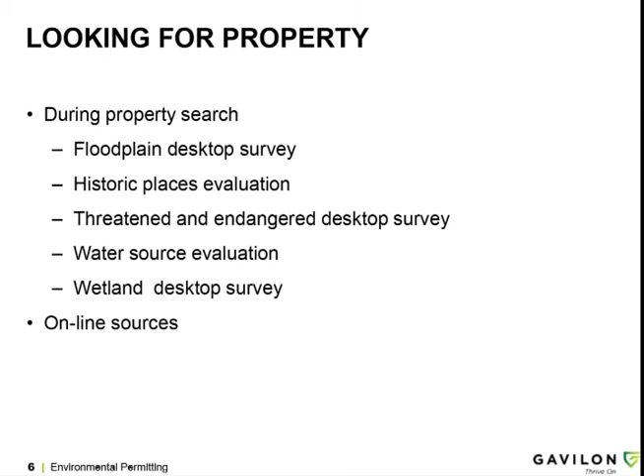One of the first things that we might check are the Federal Emergency Management Agency requirements for floods - see if we're in a flood hazard area. This is an example of a Google Earth layer you can get, where you can actually see whether your area is in a flood hazard or what flood hazard zone it's in.

It's really important because this can greatly increase the cost of a project. If you have to build up to a higher elevation, your costs are going to go up. And one of the bigger issues that you'll see nowadays is the Corps of Engineers has a program called the 408 permit. And if you're building near a levee, even if you're not on that levee, you may have to go through that permitting process.

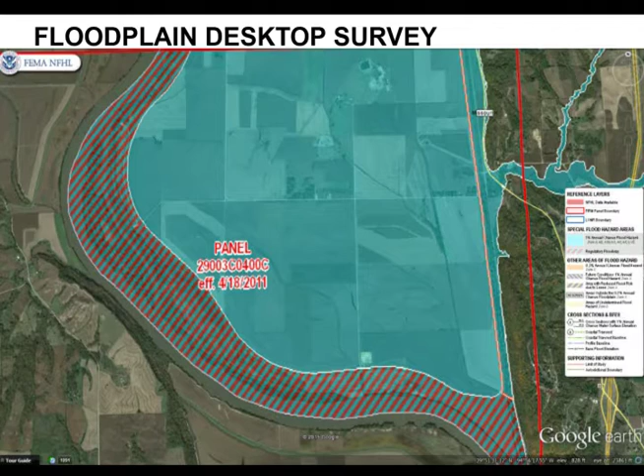And that can take up to a year and a half and require some extensive studies, so it's important to try to vet that up ahead of time. You may not preclude a property because of its proximity, but you may need to take into account that you're going to have additional time and costs associated with that one.

The National Park Service has a National Register of Historic Places. I also have a Google Earth layer for this. Most of these sites are buildings and structures that we don't tend to be building on or near, but there are a few that are just grounds in greenfield areas that might be archaeological sites. They might have found something there years ago. So I don't find these very often, but if you do run across them, they're not well delineated, so if you're anywhere near them, you may run into issues, and I'll talk about that later.

Threatened and endangered species: there's a federal fish and wildlife agency, and the name for the state agencies with responsibility for that varies a lot. It could be the Department of Natural Resources, Fish and Game and Parks. What you're looking for here is critical habitat for threatened and endangered species. Now, they don't have this listed for every state and every species. A few states have some good information, and Nebraska happens to be one of them. They have a list of, or maps with, critical habitat.

And if you are going to be doing construction in any area where there's critical habitat, you should coordinate that very early on, because threatened and endangered species, you can usually get around them if you time it correctly. They all have different times in which you could build — a nesting season, roosting, denning, pupping, mating, you name it. It's different for every single one of them, but if you figure out when that is, there are certain times you can go ahead and do construction, and once you've constructed, generally you're good to go. You don't have to worry about it anymore.

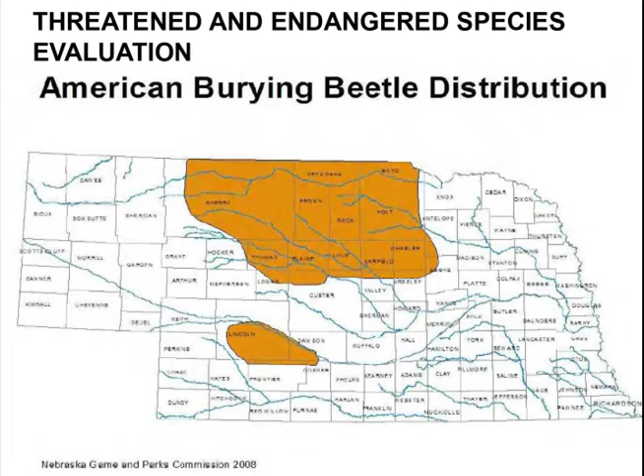And we laugh a lot about this, and I get harassed a lot when I have to do threatened and endangered species work, and it might delay a project. But it's really important to note that you have to take these seriously. If you don't know what this is — there's an infamous threatened and endangered species called the snail darter.

In 1973, this fish species held up the Tennessee Valley Authority's Tellico Dam for 6 years. They had built and spent $100 million on that project when this issue came up. And after going all the way to the Supreme Court, they finally ended up transplanting a number of these fish to a different area, and they were able to finally complete construction. So you can imagine the havoc this would create if you're trying to build a grain elevator and you had to wait 6 years. And obviously you might have a few legal fees if you have to go all the way to the Supreme Court.

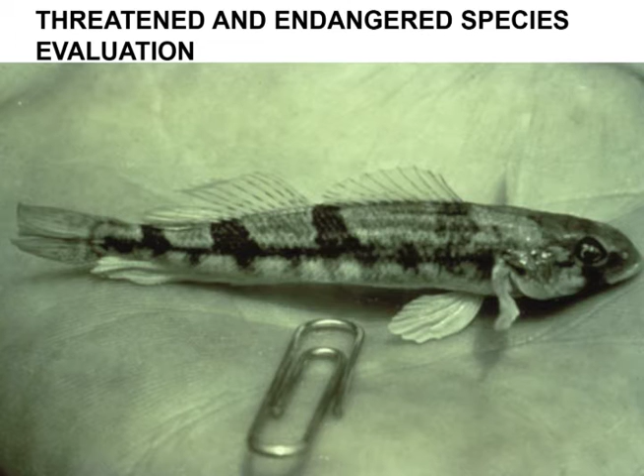Most of the grain elevators we're building aren't very water-intensive projects, but if you're also going to have fertilizer operations or grain processing, you may have to have a good source of water. This has become a problem of late. Fortunately, we've had a lot of rain in the Midwest and the Southwest that's alleviated some of this issue, but it's something you may want to look into ahead of time.

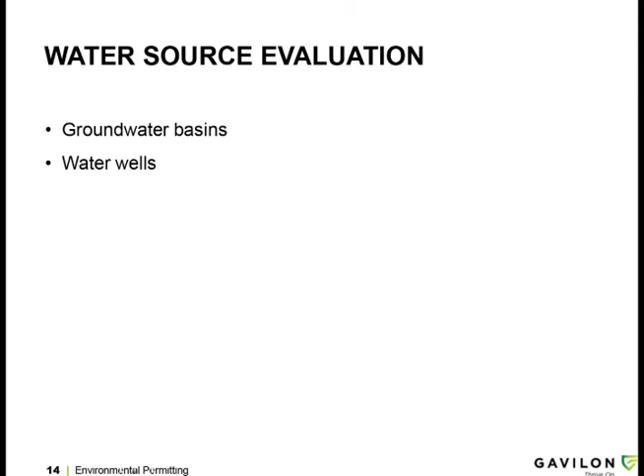There are a number of sites out there, it varies by state, but you can find information on depth of wells, how far you might have to go to get water, and then you can also find out how much water is available. There are some places where just because you own the property doesn't mean you can draw the water out from that well — you may have to purchase water rights for that area, which can increase the cost of your project.

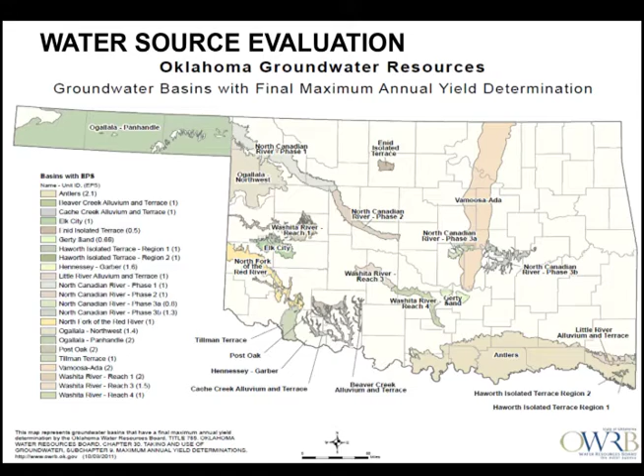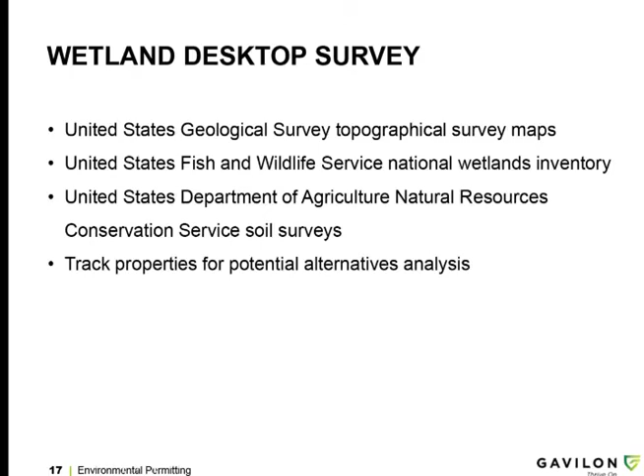And finally, the wetland desktop survey. Some people refer to this as a wetland determination. You can't formally determine if there's a wetland on your property without actually going out and having a wildlife biologist inspect the area and look at the plants, and I'll talk about that. But you can get a good idea if you're going to have issues by doing some desktop surveys. One of the items you look at are topographical maps.

If the topographic map shows any signs of water on the site, even if when you're at the site you don't see anything, that's a sign that there might be hydrology, which is one of the indicators of a wetland. So you typically check out the topographic maps.

The Fish and Wildlife Service has national wetland inventory maps, you can get a layer for this. If you have a highlighted area that indicates a wetland, the onus is on you to prove that it's either not a wetland or it's not jurisdictional. It's not uncommon—they pretty much did flyovers to determine, and did reflectivity tests to see if there was water on the site.

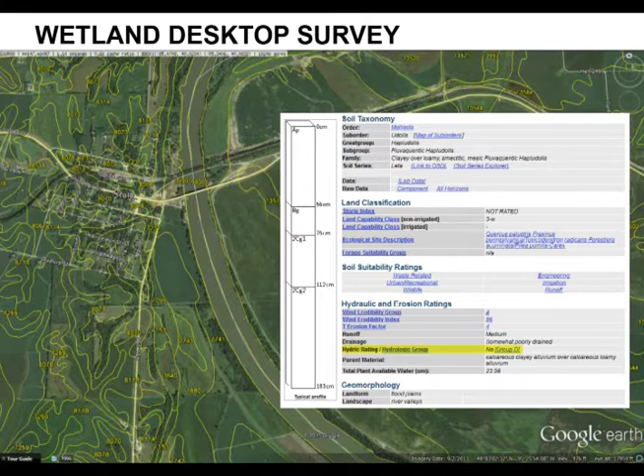So these aren't 100%. They could have just had a heavy rain that day. But I can guarantee you a regulator is going to look at these maps, and they're going to want you to prove that it's not a wetland on your property.

You can also check soil survey maps. Sometimes people do this as a geotechnical investigation, and that's often done as a fatal flaw analysis too, because depending upon the footings and things, geotechnical stabilization you need, your costs can also increase there.

Now, this will only tell you the surface soils, but you can actually go in and determine if these soils are good for wetland plants. You can click on the soil, look at the type, and it'll even tell you if it's what they call a hydric soil or has a hydric rating. So if you have hydric soils on the site, that's a sign too that you might have wetlands there.

So that's everything you might do before you even select the property you're going to get. But before you buy that property, one of the things you might want to do is a Phase 1 environmental site assessment. Typically you hire a consultant to do this because there are certain minimum criteria and qualifications they need to have, and we typically do this one month to 180 days before you buy the property.

One thing a lot of people don't know is under the environmental liability rules that we have, you could be held liable for the cleanup of that property, which could be millions of dollars, even if you had nothing to do with it. You bought property that had some contamination in it, and you didn't contribute to that contamination or cause any of it.

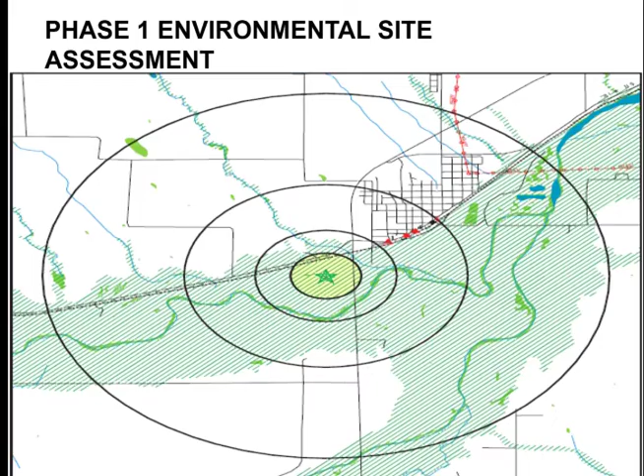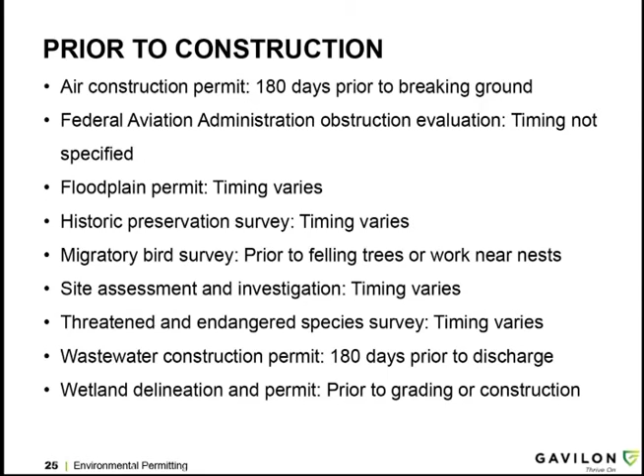Once you've bought the property, but before you start breaking ground, there are a lot of items you might need to take care of well in advance of potential construction projects before you actually break ground. One of the biggest that Eric will touch on even more are the air construction permits.

There are a lot of different types of permits out there. It depends on the state and the project, but it could take up to 180 days to get the permit. Some states have statutory limits on how long it takes. Like Illinois says once you give them a complete application, they have to give it to you in 90 days. And, of course, I've done permitting there, and it took 90 days exactly—they finally sent me that permit application.

Other states have other statutory limits, but what you'll see happen is that limit doesn't start until you've given them a complete application. And what they'll do is reject that application for any small discrepancy because they're under a lot of pressure to get them done on time. So I would start these as soon as you can, once you know what your project's going to be.

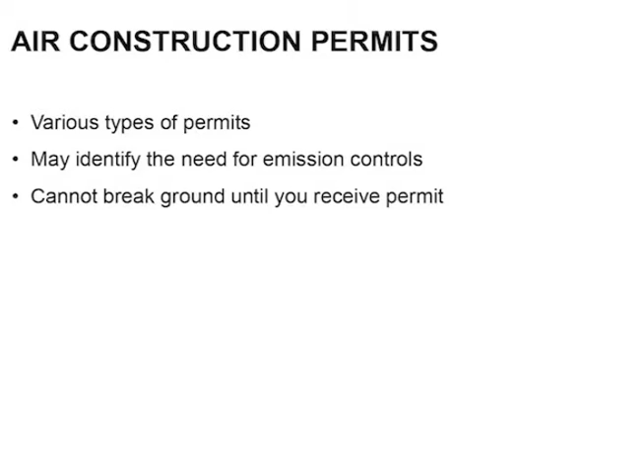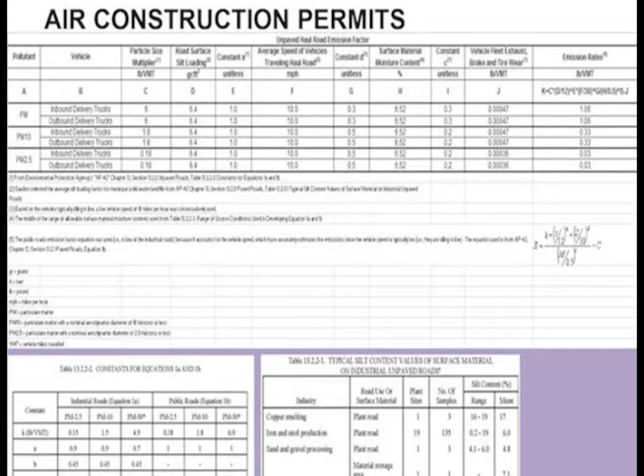To do an air permit application, you're going to give them a lot of information about your site, your company, and what you're going to do there. You're also going to have to do emissions calculations, using available Environmental Protection Agency emission factors to determine how much—probably particulate matter is the primary pollutant we have—is going to be emitted from the site.

And if you're unlucky, you might have to do air modeling, which can be expensive. If it shows that you're going to exceed a national ambient air quality standard, you may have to put in some sort of control devices. Your emissions may require you to do that too. So it's something to start way ahead of time, because that can greatly impact your bottom line, or your project.

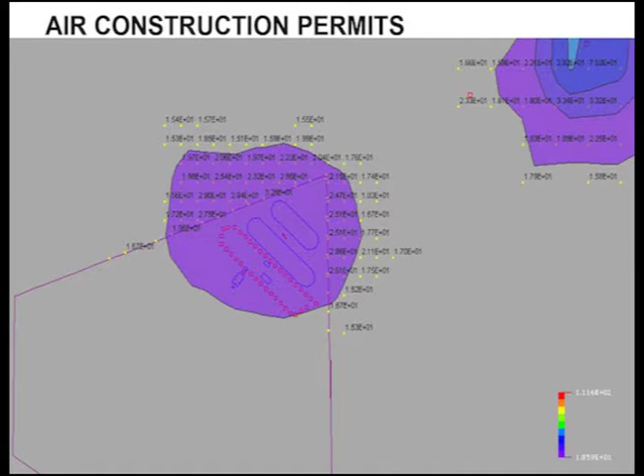Now, this is an environmental issue, but sometimes I just get stuck with permitting items. It doesn't matter what the regulatory agency is. So I threw this in there because you may end up getting stuck with it as well.

The Federal Aviation Administration has an obstruction evaluation that you may have to complete. They have this really complex formula depending upon your distance to an airport, with all sorts of criteria, but the general rule is if your building is going to be over 200 feet tall, or 150 feet within 20,000 feet of an airport, you may have to submit this obstruction evaluation criteria to the FAA.

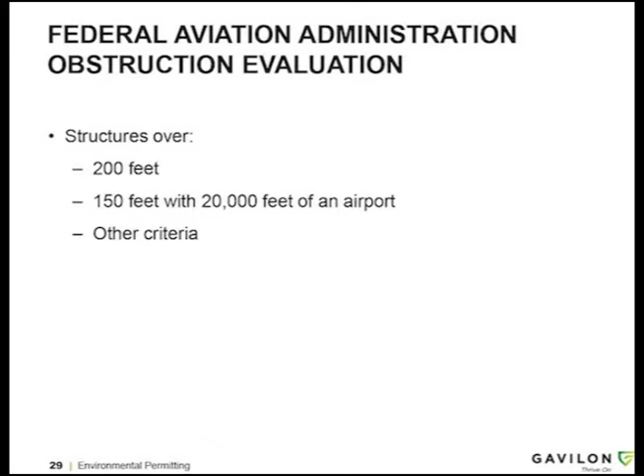Now, when I talk about 200 feet or 150 feet, we're talking about the overall structure, not just your grain bin. So if your legs, head house, or something else is taller, that may require you to submit this. I haven't run across this, but at the end of the day, they could possibly deny it because you're too close to the airport or require some sort of lighting device on top of it.

We've been fortunate and never been required to do that. And one thing to keep in mind when they say proximity to an airport, we're not talking about O'Hare Airport, we're talking about some pretty small airports. I've been shocked when I found out that the FAA considered certain grass fields that somebody lands a plane in occasionally as an airport. So you have to make sure you evaluate that carefully.

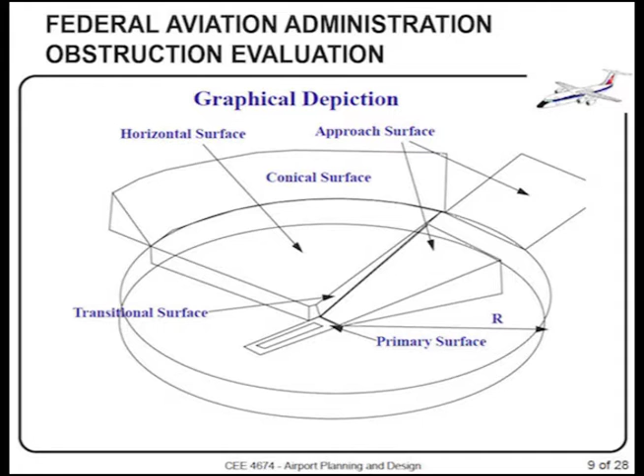So I mentioned the floodplains earlier. Depending upon the floodplain coordinator, which I see a lot of variability in, the local coordinators tend to ask for different things, but you may have to do a no-rise or encroachment certification. What that means is your project isn't going to cause the flood to be worse, because you're not going to displace the water and cause the flood to be worse because of your grain elevator.

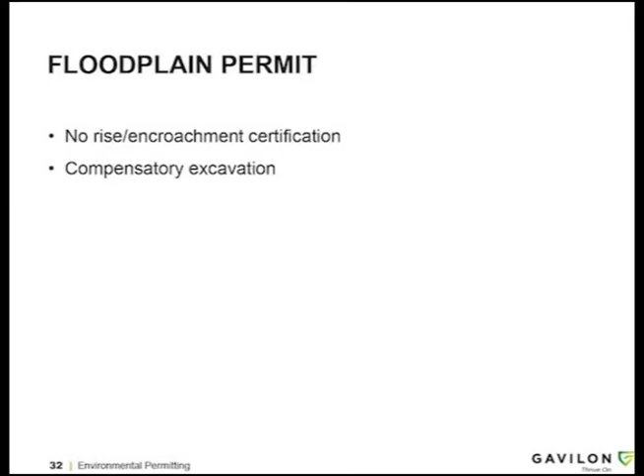So you may also be required to flood-proof or raise up your occupied buildings above a certain level. And the other thing they might do is they might require you to offset your building. So if your building's going to displace 100 cubic yards of water during a flood, you can dig a sedimentation basin that's 100 cubic yards to offset that in a nearby area.

The National Historic Preservation Act doesn't have a permitting policy for it, so there's nothing that you normally are required to submit to the State Historic Preservation Office, but there are a number of other permits that you may have to submit, and they will ask you to either submit something to the State Historic Preservation Office or they will submit something for you. The Corps of Engineers will do this. They'll ask for comment from the State Historic Preservation Office, and that's why it's important to address that early, because you never know who's going to send something to them.

And these are interesting projects when you get them. The State Historic Preservation Office, depending upon your location, and I don't have a good understanding of when they're requiring this or not, but they may require you to do a Phase 1 survey. And they'll go out to the site, and they're looking for certain indicators. Sometimes they're just looking for ridges that stick out from the normal topography. And they're going to do some shovel tests and dig down and see if they see any archaeological sources.

And if you're unlucky and they find something, you're going to have a couple options. You can either avoid that area, build somewhere else, or you can do further study to verify whether it's truly an archaeological source or historic place. They're going to go out and they're going to dig a pit, and they're going to sift through all that. I haven't had this delay a project yet, but these can be really time-consuming and cause a lot of problems.

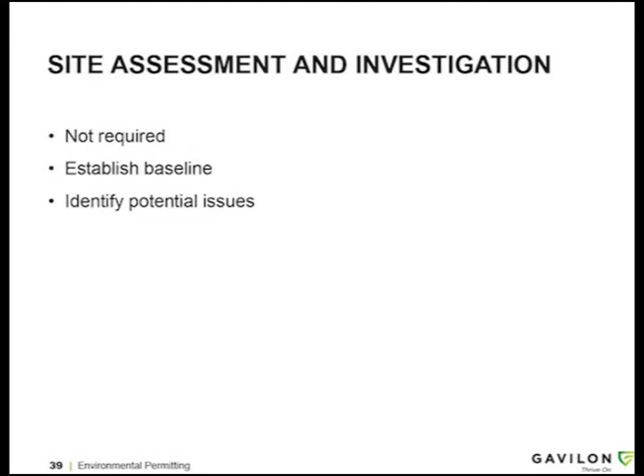And threatened and endangered species surveys—hopefully you've coordinated with your state office on this. This is very timing specific, as I mentioned earlier. Hopefully you can avoid having to do this, but if you can't, you may have to do a survey. You'll have to have a wildlife biologist come out. And I get harassed the most over threatened and endangered species out of any of the things that I do and am made to do.

One of my favorites: on one of the projects we worked on, if you're in western Kansas, western Nebraska, or South Dakota, you're in the swift fox area. It's a threatened and endangered species, and we had to have a wildlife biologist come out and do a den survey. They looked for any holes in the ground, and around all the holes they found, they had to spread a sand and glycerin mixture, wait a day or two, and then look at the tracks to see if any were swift fox tracks. Fortunately, none of them were—but that didn't prevent all my coworkers from volunteering to go hunting and take care of that issue for me.

But this is very species dependent. Every endangered or threatened species has a different type of survey and timing issue, and that's why you really need to get on that up front and talk to the regulators. Generally it's not something you can't get around, but you need to plan for it ahead of time.

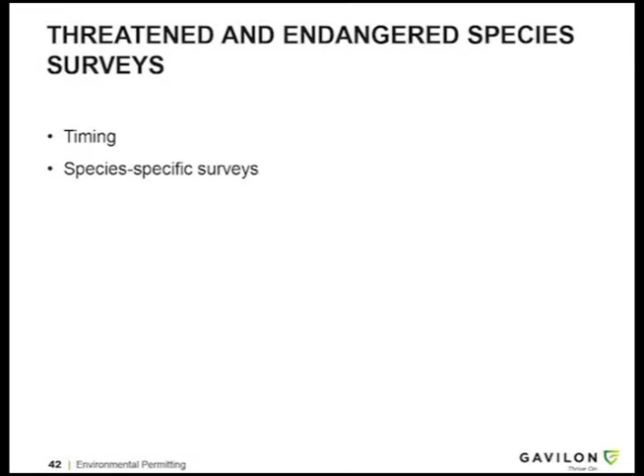And finally, wetland delineation and permitting. This is one of the more controversial issues that we deal with. There are lawsuits—the Corps of Engineers just recently issued some guidance, and they're being sued again over that. One key thing to remember is you have to do this delineation seasonally. You can't go in the middle of winter, because if it's snow-covered or there are no plants at the site, they won't be able to do the delineation. So you have to plan the timing on this as well.

One of the reasons this is so controversial is you may not have any water at all and have a wetland on your property. This is one of the things I tell people all the time - I don't always try to make sense of the regulations, we just try to comply with them. Why would a wetland be wet? That's just how the regulators think of things.

So you need to have somebody who's probably a wildlife biologist or knows the plant life in your area come out to the site, and they're going to look for 3 criteria. They're going to look for hydric soils, do a shovel probe, and survey the soils to determine if it'll support wetland plants. They're going to look for wetland plants, wanting a dominant wetland species in each area or canopy - looking at the ground, the shrubs, and the trees, all different wetland-type plants they might have.

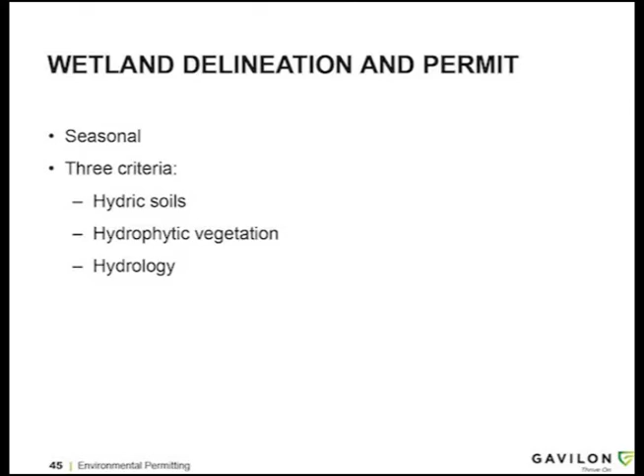If you have wetlands on your site, obviously the first thing you want to do is try to avoid them. If you can't, you may have to submit a permit. Depending upon the quantity of wetlands you're going to disturb, you may be able to get by with a nationwide permit, which is real easy with a limited time frame - may only be 90 days. But if you have to do an individual permit, we could be talking - I know in one state they said 1.5 years to get that permit. So trying to avoid them is important.

When I talked earlier about doing that desktop survey for wetlands, one of the things it's good to do as well is to track all the different properties that you look at, because they are going to want you to submit, if you're going to disturb a lot of wetlands, an alternatives analysis - meaning you have to show them you looked at all different types of areas and didn't just select the one with the most wetlands. Fortunately, when you discuss why you chose a particular site, you can take into account production issues like access to rail, farms, highways and things like that. But it's good to keep track of that information in case you have to do this permit.

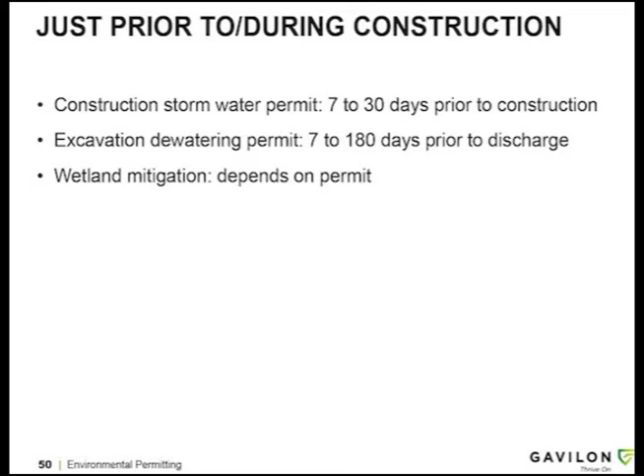So that's all the things you need to do well in front of beginning construction. There are a few things you do either right before construction or maybe even during construction. The construction stormwater permit is one of them. If your project is going to disturb an acre of ground or more, you're going to need to submit a construction stormwater permit to the state. Most states, this is 7 to 10 days - there are a few states that have 30-day time frames. One of the issues is that in a lot of states, they are also going to want you to coordinate with the Historic Preservation Office and the Fish and Game or Threatened Endangered Species entity, and that can take longer.

In Nebraska, it's great because you are automatically approved once you submit it in 7 days. But what they don't tell you is that the Nebraska Fish and Game takes 30 days to review and approve it, and they can't get you your construction permit until that's done. So you've got to give this a little bit of time. We're talking about disturbing 1 acre or more - if you have a 10-acre project, you can't just divide it up into 11 parcels and say it's not disturbing 1 acre. They're wise to that; they look at the greater project development. A lot of home builders try to get away with that - they would have all these 30 acres broken up into half-acre lots and say they don't need a construction stormwater permit.

So the purpose of this permit is to prevent erosion and sediment. You have to submit the permit application and develop a plan which identifies the sediment and erosion control measures - that's your typical silt fences that you see at these sites.

During construction, depending on the phase, you'll need to do inspections weekly or monthly, and after every rainfall event of a half-inch or more, you need to go inspect. One mistake people make is forgetting that this permit remains active until you get final stabilization, meaning all disturbed ground must be covered with a building, concrete, a stabilized pad, or natural vegetation. People forget to account for this up front, leave open soil, and can't close the permit, so they have to keep doing inspections in perpetuity. It's important that your contractors know to put in vegetative stabilization when they're done, so you can close out the permit. Otherwise you have this open liability.

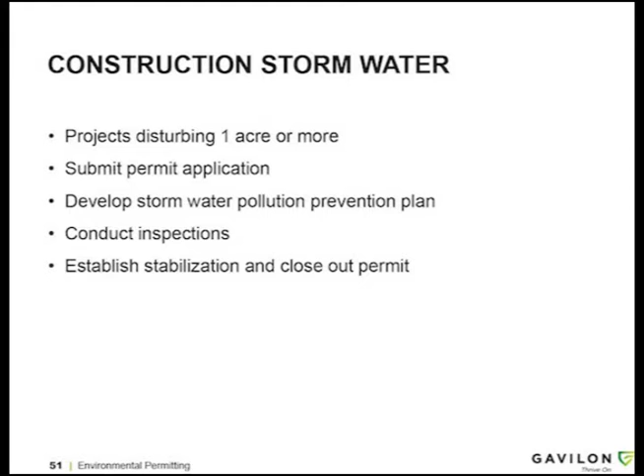Excavation dewatering: some construction permits cover this so you don't need a separate permit, but some states don't include that. So if you've got a high water table or a lot of rainfall, you might have to put in a dewatering pump and discharge the water to do construction, and you may need a permit for this.

This permit has varying time frames. A lot of states have general permits you can get quickly, but you'll probably have to sample the water. They want to make sure you don't have a lot of sediment, and may send it for analysis of sediment, oil, and grease. You'll have to fill out your monitoring report, possibly going online or submitting information showing the concentrations and volumes of water you discharged.

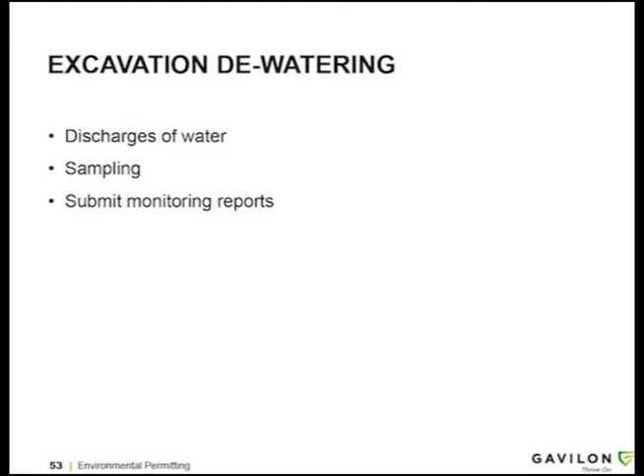Finally, the last permit you might need, typically addressed during construction or towards the end of the project, is if you've impacted a certain amount of wetlands, you may have to mitigate them, meaning you build a replacement for the wetlands that you filled in.

You have two options: on-site mitigation or a wetlands bank. Fortunately, for grain elevators, if you have a rail loop on your site that you're not going to fill in with ground storage piles, that makes a great place to put in a mitigated wetland. You can build one yourself. The key is to take the soils from the old wetland, stage them on the side, then put them into your new mitigated wetland area, which helps get growth going. The Corps of Engineers will want you to monitor this for a certain number of years, maybe 5, having people check that it's growing appropriately. They'll likely require some sort of deed or covenant change protecting that wetland in perpetuity - you can't just build it and then fill it in again three years later. It has to stay forever.

Your other option is a wetland bank. If you can find one in the same watershed, you can pay somebody - you say you need a certain number of acres of wetland built, or need to buy that many from them, and they set those aside for you. It's a little easier, you don't have to do as much, but you have to pay for it. Typically, if you're going to fill in 1 acre of wetland, they'll want a 2.5 multiplier - so you fill in 1 acre, and they want you to build or buy 2.5 acres of wetlands.

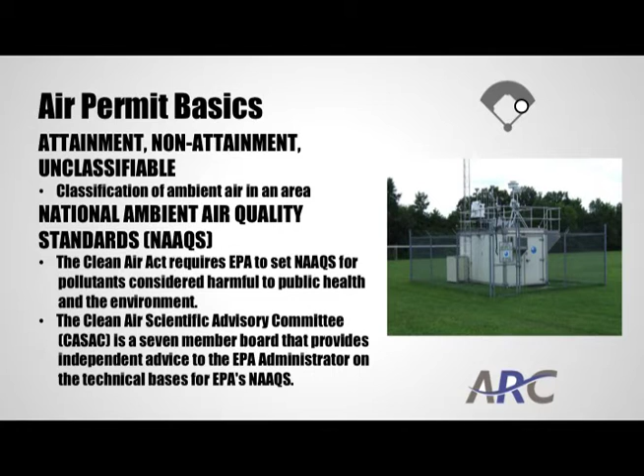Brian touched on this, and I'll skip over it quickly, but when people talk about air permitting, it's not just one type of permit. There are many types of permits out there. There's construction, operation, many types of construction permits, many types of operation permits. And they all have different thresholds, different requirements, and different triggers.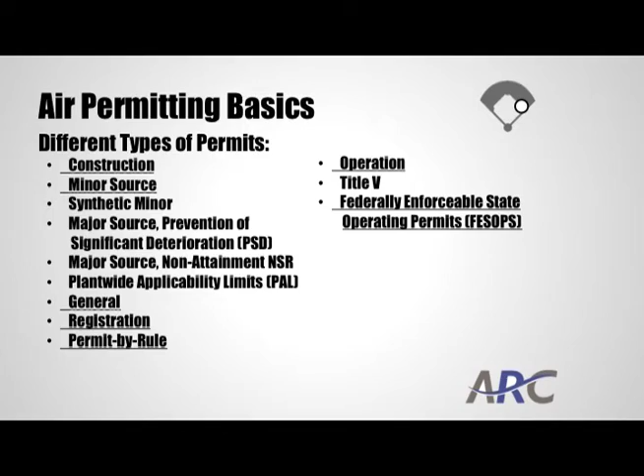It's been said a lot, so I'll just repeat it, but construction permits are needed before you begin construction. In general, what is construction? We have to define it. The Clean Air Act, in most states, calls it the initiation of physical on-site construction activities on emission units which are of a permanent nature. So that would be maybe pouring concrete or setting footing, something permanent. These are things that you cannot do until you actually have your permit in hand or a waiver to begin construction.

Operation permits are something that are usually required 12 months after you begin operation of the unit constructed and you already have the permit in hand.

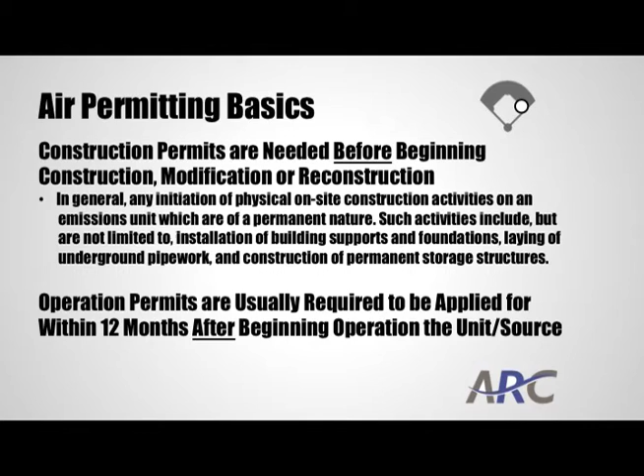I know we have a large group of folks here coming from a lot of different areas, and it's great that so many people could come. But we can't really focus on each state because we wouldn't have time to do that. I just want to keep in mind that each state has its own permitting agency, because sometimes there are local districts within a state. They have their own techniques, mechanisms, and ways of issuing permits and processing applications. So it's something to keep in mind: where you're at and who's writing your permit is going to depend heavily on how it's going to end out.

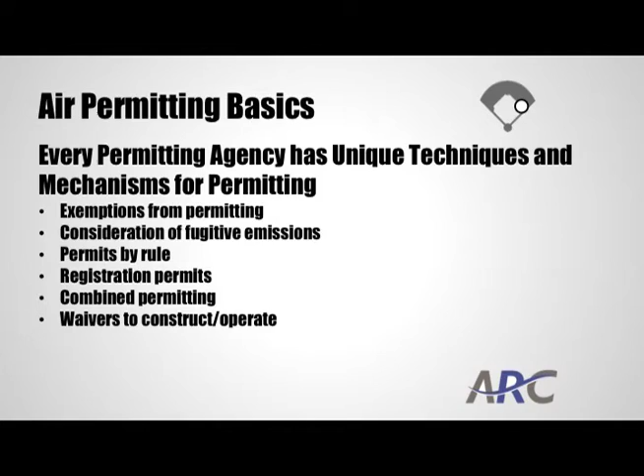So when we talk about emissions at your plant, what are those? What do we have to consider? What do we not have to consider?

Just in general, when we talk about emissions, these are usually dust, fume, smoke, vapor, gas, or other gaseous or fluid particulate matters coming out of your stacks or from different areas. In grain elevators, we're usually talking about particulate matter, so that's short for PM.

The PM will mainly come from hauling, receiving, handling, storing, drying, cleaning, and shipping grain. There's also combustion emissions to take into account, from combusting natural gas or diesel on site, which causes carbon monoxide, nitrogen oxides, greenhouse gases, sulfur oxides, and maybe trace amounts of HAP. These would all have to be considered for permitting as well.

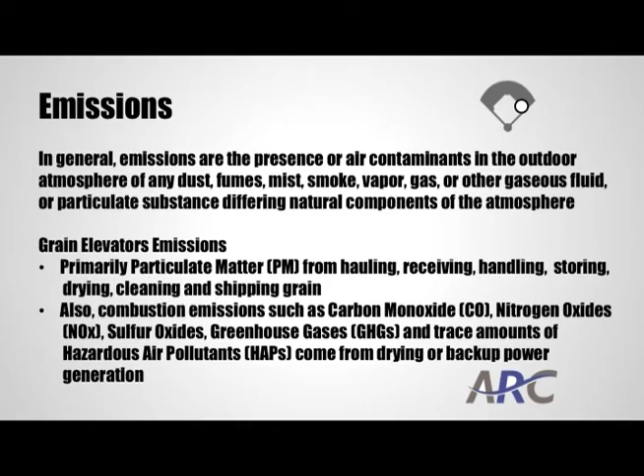CEU question here. In general, the emission's source is any stationary source of emissions or group of stationary sources of emissions. So sometimes it's not just your elevator or what you consider to be your elevator - it could be an elevator nearby, or a plant nearby. You have to take into account the proximity and location of all emission sources in a particular area, your industrial classification, and the control and ownership of the different sources in the area.

So if you maybe have a contract to give grain to another person or entity nearby that also emits, sometimes you have to consider that entity as well when it comes to Clean Air Act permitting.

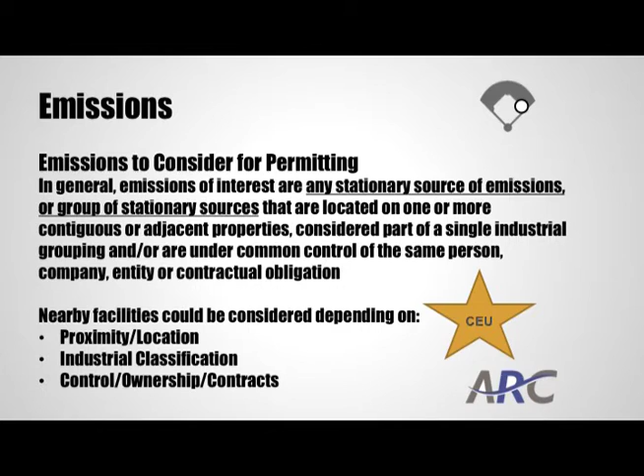Also, not all emissions are created equal. Sometimes we have stack emissions - those are primarily the ones you'll see with limits in your permit. But then there are fugitive emissions too, which come from a road or maybe a storage pile. Your dryers are oftentimes considered fugitive emissions. These are ones that cannot reasonably pass through a stack.

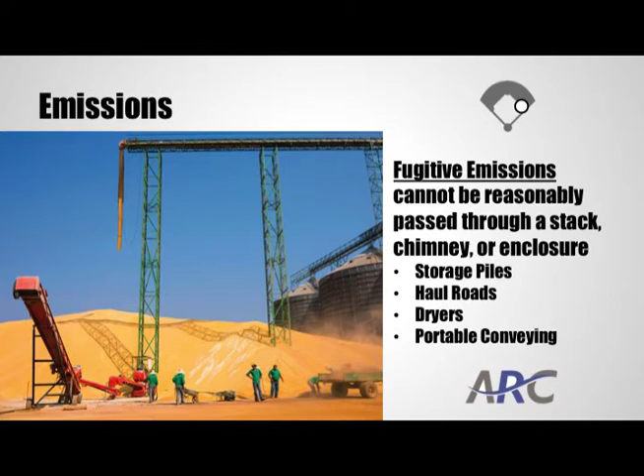Circling back to PM - it has many different phases, and since 1970 it's been regulated in many different ways. Without boring you with the history, it really started out as just the filterable particulate pollution that you could see, the heavy suspended particulate.

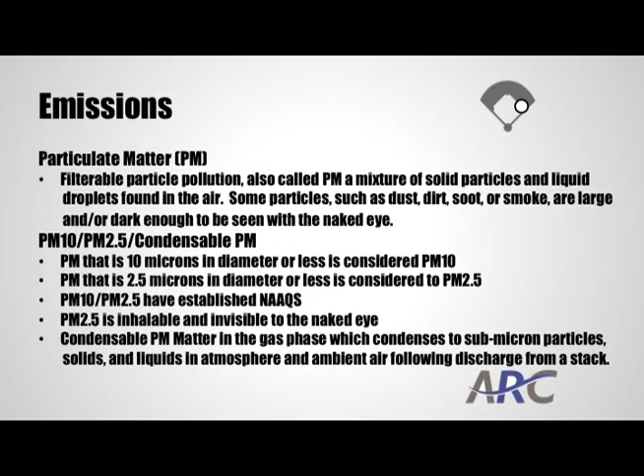As more research was done since 1970, people started to figure out about PM10 and PM2.5 - particulate matter less than the size of a hair. This is the stuff you can actually breathe, and this is what EPA and state agencies started to focus on, because this was the one that was actually hurting humans. These are so small that oftentimes when you inhale them, they get lodged into your lungs, and this was the one EPA was actually worried about.

And PM2.5 also forms in ways that you can't see. So after you combust natural gas, it gets into the atmosphere, and these really light gaseous matters condense into particulate matter of PM2.5.

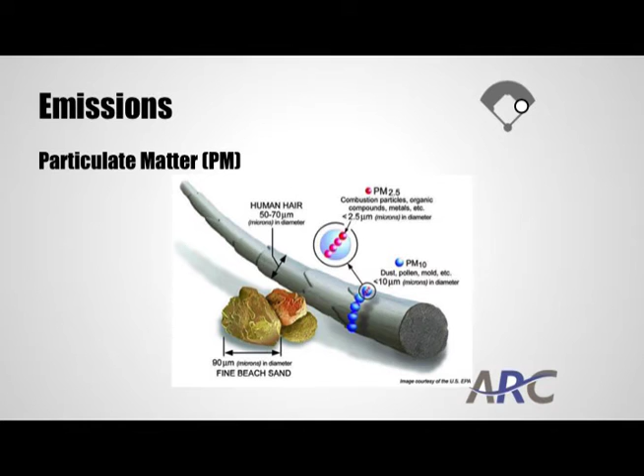A baseball reference here - if you build it, they will come, from Field of Dreams. I think building is a great thing. It helps customers, profits, operational flexibility, but when you build, you have to consider that changes can be public information - it can be in the newspaper, visible from a roadway - and if it is, and you don't have the permit, regulators could also be coming as well.

Another CEU question: how should emissions be evaluated when considering if we need permitting? By a show of hands, who's heard of the term potential to emit?

This is a very theoretical calculation that makes you want to hit your head against the wall sometimes, but it's taking into account if you have a piece of equipment operating 24/7 - and you don't get to consider the add-on controls unless you have a permit or some other regulation requiring you to operate that control device. So imagine a dryer operating 24/7, which would probably never happen, but for potential to emit purposes and considering whether you need a permit, you have to consider as if it would run 8,760 hours a year.

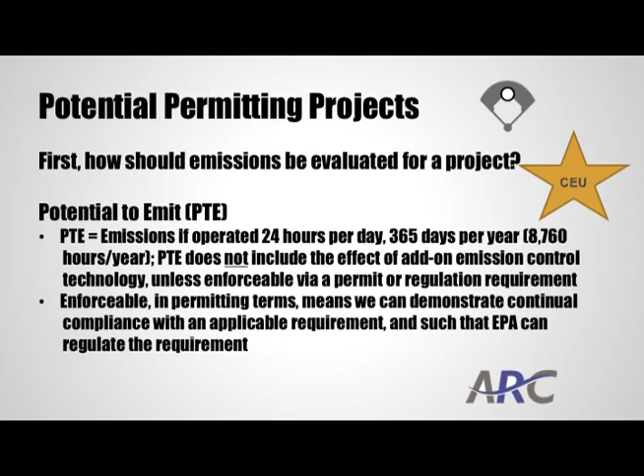And when considering if you need a permit and evaluating potential to emit, people always talk about change - what's a change, what's happening at the facility? The Clean Air Act really doesn't say what a change is, which can make this difficult. It says what a change is not, but it doesn't really say what a change is. By the way, things the Clean Air Act does say are not a change include ownership adjustment, increase in hours of operations, or routine maintenance and repair.

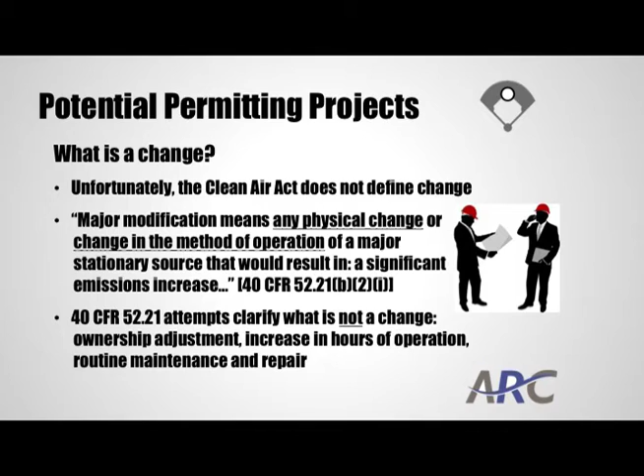But there are things you might need to consider for air permitting, and this is just a short list, there could be others. Building a new plant, or a new plant coming nearby. Changing or removing pollution control equipment, changing stack location or pickup point, changing your process flow diagram, maybe grain's going to be handled or stored differently, or cleaned differently. It could also be changing your haul road routes, maybe changing the way trucks come in or out, like we talked about paving roads in another presentation. These are all things that could be considered on whether you'd need to change your permit or apply for a new one.

Essentially, if you have a previous permit application, and you're changing anything from that application, it would probably need to be evaluated for permitting as well.

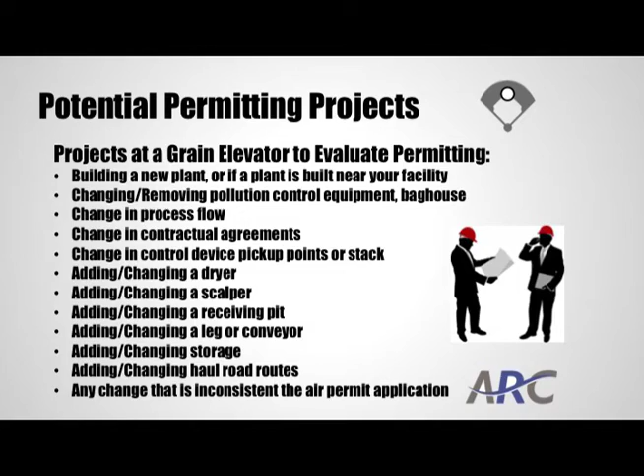I'll try to skip through these pretty fast since we're running a little behind, but every state has their own permit thresholds. These are kind of federal EPA major source construction thresholds, so if you trip these, you'd have to go down the route of submitting a permit application to your permitting agency.

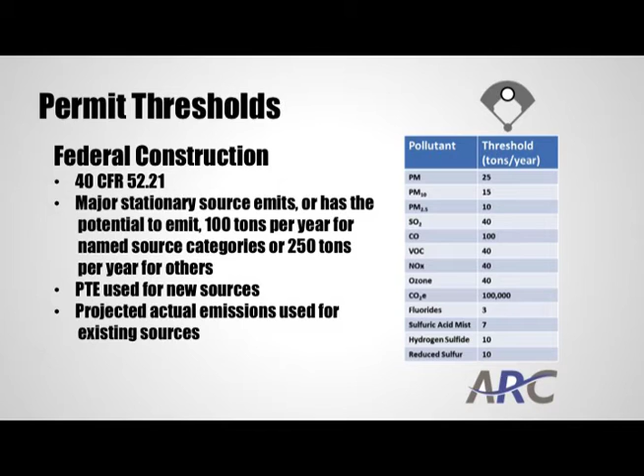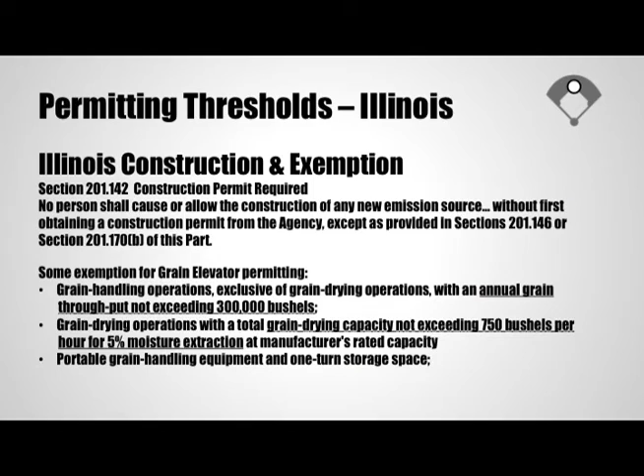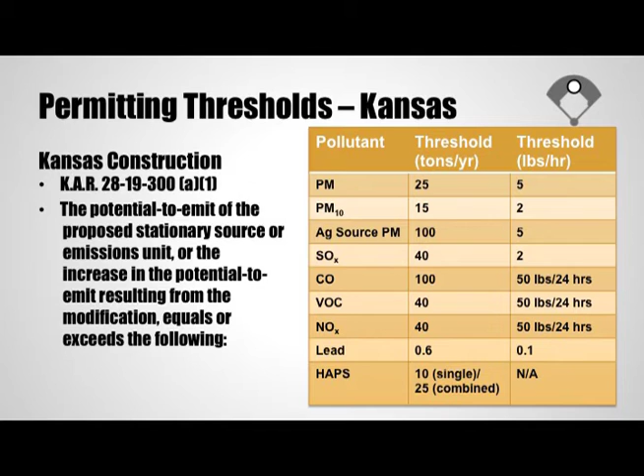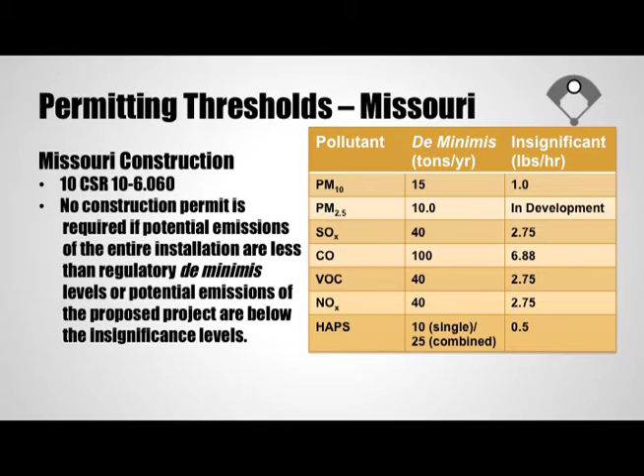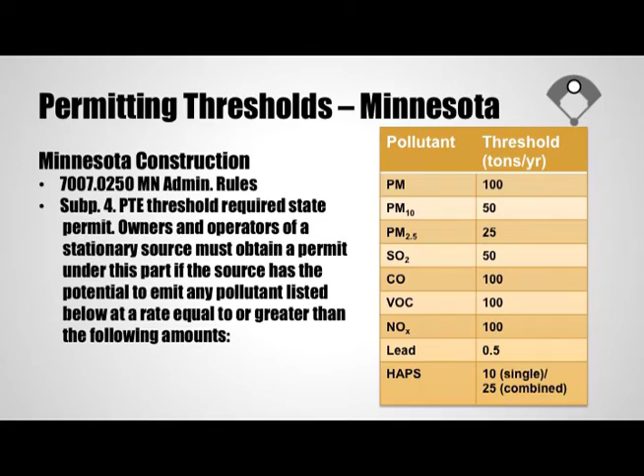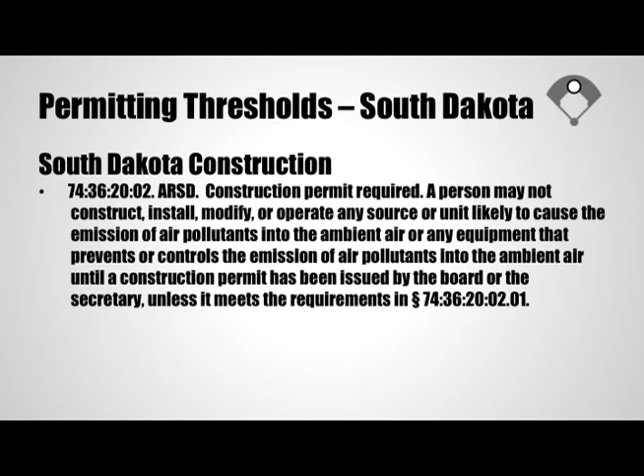Something Brian touched on earlier, and I just want to reiterate, how long it will take to get a permit depends on a lot: the size and complexity of your project, the permitting agency writing the permit, and also the expert advice being utilized to submit your permit application.

How long will it take to make an application? It'll depend again on those three things, but you have to do emission calculations, a regulatory analysis to see what federal and state standards apply, fill out a lot of forms, and many times you have to do ambient air modeling, which we have a graphic up here for. Sometimes you even have to negotiate with your permitting agency about what kind of application you should be submitting.

After your permit application is deemed complete, which can take a while for your permitting agency to determine, they then have to process it to put your permit out on public notice. So it can take 3 to 12 months, shorter or longer. Most agencies, I'd say, take 6 to 9 months, but some act a little faster, and some take a little longer.

The public comment period is usually 30 days for these permits, that's for the public to give input on whether they agree or disagree with the permit, or have any issues with it. Each permitting agency actually has a requirement to respond to all these public comments. So as you can imagine, if somebody was really challenging a permit and didn't want it built, and the Sierra Club does this a lot, other environmental groups will challenge permits just to hold them up so state agencies can't issue them. I think this is a horrible thing, it makes the project get held up for a very long time.

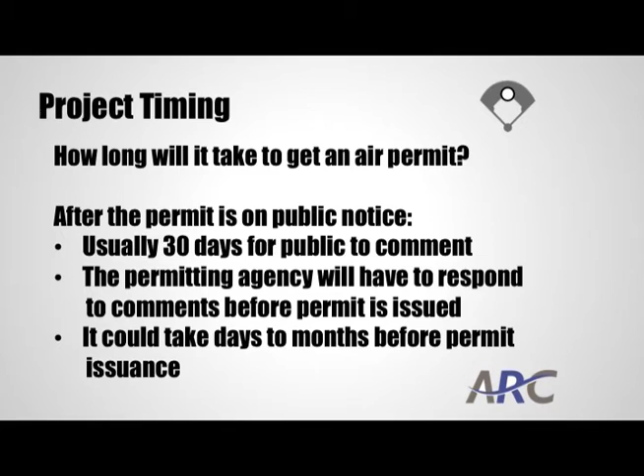So when you're looking at permitting from conception to permit issuance, the best case would be maybe 4 to 5 months from when you come up with the project to when you actually get your permit in hand. The worst case could be a year or multiple years.

But is there a way to expedite the process? There is, and this is why it's very important to consider what state you're in, where you're at, and what regulations would apply to you.

So there are permits by rule. This is where we just submit a notice of applicability to the state. Maybe the state already has rules for grain elevators, so you don't actually have to get a permit. You would just submit a notice to them saying, this is what we're building, and by rule, we'll have these limits. There's also registration or general permits. This is where you submit a general application, and then a general permit is issued to you.

There's also waivers and variances to construct. This is where, maybe due to economic hardship or natural disasters, we need to build before a permit's in hand. So you can get a waiver to construct.

Also to expedite the process, have permit meetings with the permitting agency. If you stay in front of them, try to say, hey, we need this permit right away. Keep talking with them, give them all the information they need to process the permit. I've even written permits for states so that they could just get it out the door quicker. That's when we're up against a time crunch, we just have to get these permits as soon as we can.

Another thing to keep in mind is if you have a good permit to begin with, maybe it would allow for future growth. That would also expedite the process. You have a good permit already, and it allows you to maybe add a dryer or change your roads or something like that. But if you have a flexible permit to begin with, that could expedite the process so that you don't have to go get another construction permit.

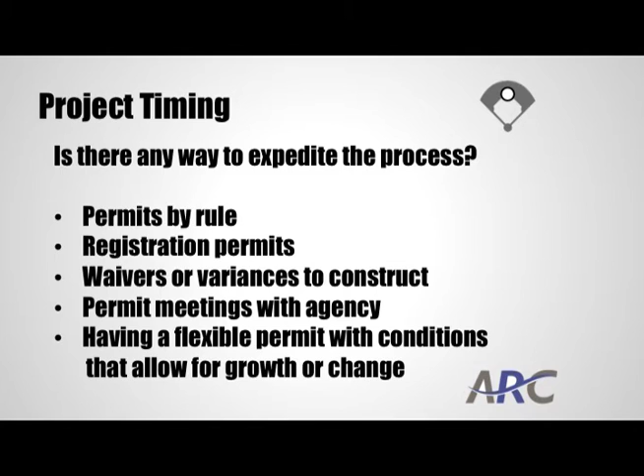Go the distance. What distance? That would be just say maybe the extra mile.

When it comes to Clean Air Act permitting, understanding permit requirements can be difficult, but it's great to understand what's in the permit. Also, knowing all the applicable regulations, which can change on a daily basis. And then track future projects nearby so that we can foresee these projects that might take months to years to permit.

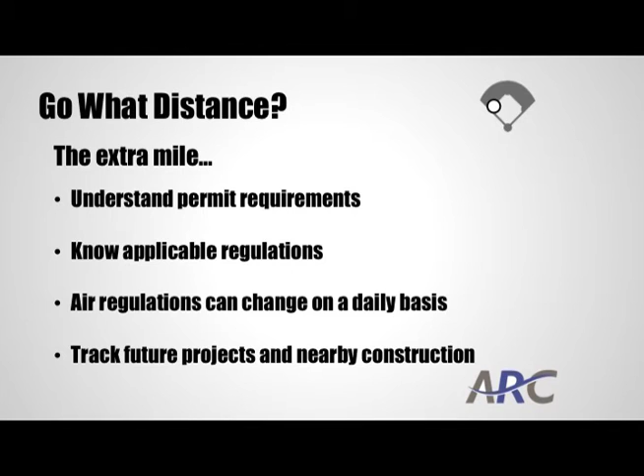Real quick, permit contents and requirements. Once you get your permit, what's going to be in it? You'll see descriptions, capacity limits, compliance demonstrations like monitoring, record keeping, and reporting.

Typical monitoring and record keeping is like grain throughput, hours of operation, control device differential pressure readings, fugitive dust monitoring, device management plans like haul road or control device management plans. That would be how you're supposed to maintain your baghouse or maybe how you're supposed to maintain your haul roads. Maybe checking the silt content of your haul roads. These are all things that can lead to emission events or high emissions.

Opacity observations, that's where you'd be looking at a stack or maybe an area to see how much light is transferring through it or seeing if there's any dust coming from it.

Typical reporting requirements that you might see in your permit once it's issued: maybe notice of beginning construction or operation, advance notice before you're going to be doing stack testing, annual and semi-annual compliance reports, testing and monitoring, annual emission reports, excess emission events. There's going to be a lot. So I guess what we're trying to say is that it's not just a matter of getting the permit. Once you have it, there's going to be a lot of requirements as well.

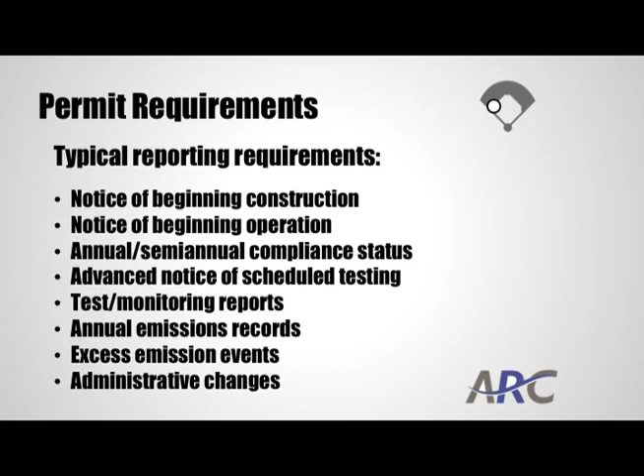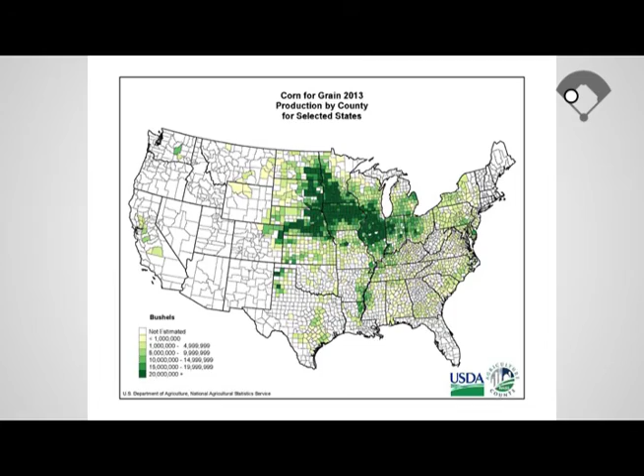When we were talking about what you need to consider for nearby sources, this is a graphic I showed at an ethanol production conference recently. This is where the majority of grain or corn grain is made in the United States, and this is where all ethanol production facilities are located. I mean, that makes sense—you would put ethanol production right next to or near a grain elevator.

But then something to keep in mind is that to a regulator, they might try to consider it the same source for permitting, which could hold up a lot of things. Because if you have to be under the same permit as a plant nearby, it's probably going to be a more complex, more difficult permit to deal with, because they have a lot of different sources that a grain elevator wouldn't have.

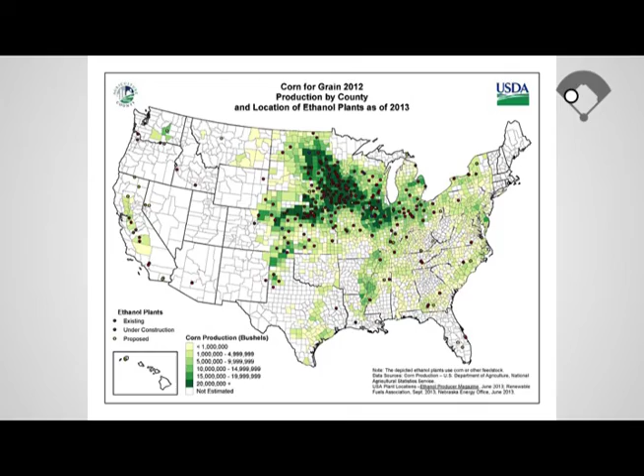So just a reminder to keep in mind when it comes to this graphic: what is nearby your facility, keep in mind these single source considerations. The proximity between locations, the industrial classification code, and also common ownership can all be taken into account to consider whether or not you have to be one source for permitting and have one permit as opposed to separate permits.

And then if we have time, we'll cover the new source performance standards. These are under Section 111 of the Clean Air Act, or Part 60 of the CFRs. It authorized EPA to develop standards. It kind of sets the base for everybody, so everybody must achieve these standards. All the states we talked about have their different standards, but the CFRs, Part 60, and NSPS establish this ground base for what everybody needs to achieve.

Something else to keep in mind is even if your state has delegation to do the NSPS, EPA retains its authority to enforce it.

The NSPSs are supposed to be updated every 8 years. The last time the NSPS DD for grain elevators was updated was 1978. It's been amended maybe 3 or 4 times in the past, but it was never actually updated completely.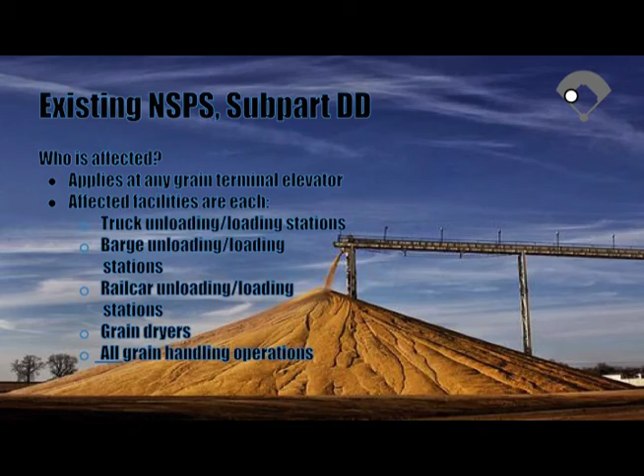Who is affected? I think we all know this already. It's grain elevators, truck unloading stations, barge unloading stations, rail car, grain dryers, all grain handling operations if you're of a certain capacity. What is that capacity? CEU question here: grain elevators are the ones handling all of this, but grain terminal elevator is the one you want to consider for NSPS DD and the new DDA.

Grain elevator means any permanent storage capacity of 2.5 million bushels. There's also a lower threshold if you're at a certain area, like if you're located at a wheat or flour mill—it's 1.0 million bushels permanent storage capacity. But for the most part, I think most sources are under the 2.5 million bushel threshold on whether or not you have to meet the requirements of NSPS DD.

What are the requirements within DD? If you were to pull it up and read it straightforward, it might be a little confusing. But with bullet points, for the main part, the dryers have to have a certain design requirement, and that's for their plate perforations or their mesh on the screens. This is really the existing part. I'll try to get through this quickly so we can focus on the recently updated DD.

So DDA—this happened last summer, June 27th. EPA proposed new NSPS for grain elevators as subpart DDA. So they took DD, and then followed up and made a whole separate part DDA. It wasn't actually published in the Federal Register until July 9th, 2014. So July 9th, 2014 is now a new magical date of when you're considered under DD or DDA—that's if you modified, reconstructed, or started construction after July 9th, 2014. According to EPA, then DDA is what applies to you.

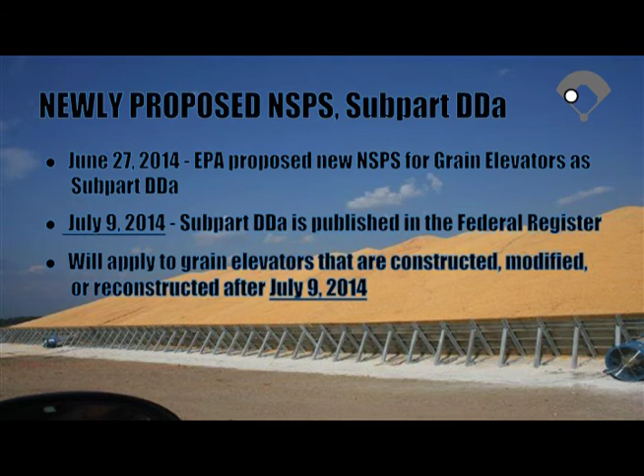And as we'll talk about, what's in the new DDA, there's actually a lot. They updated it pretty heavily, and unfortunately, as we get to the end, you'll see it's not for a whole lot of benefit, but there are a lot of new requirements. So there's new PM limits, new limits during startup, shutdown, and malfunction. There's additional testing, monitoring, record keeping, and reporting. And there's also a definition for temporary storage facilities, which is something new.

Why did EPA do this last summer? Well, in part, they're supposed to update the regulation every 8 years. They never do that for all their NSPSs, but it's been about 40 years since, so maybe they felt obligated to do it that way. But also in November 2007, EPA issued a letter talking about how you're supposed to consider these storage facilities and these temporary storage facilities, and that you should be considering them for applicability to NSPS DD.

But a lot of people didn't like that. I didn't like it. It didn't make a whole lot of sense what the EPA was doing when their enforcement office issued guidance on how you handle these temporary storage facilities. Even the NGFA petitioned the EPA to reconsider and rescind that kind of enforcement action. The NGFA is also fighting, in a good way, to try and remove grain elevators from the NSPS altogether, which I think is a great idea. Grain elevators don't emit as much as other facilities when you consider boilers, turbines, and things that really emit a lot of pollutants.

Another reason why NSPS DDA needed to be updated is that there was a court case with NRDC and EPA talking about emissions during startup, shutdown, and malfunction, and whether or not emissions should apply during those kinds of events. Essentially NRDC won, saying there's no affirmative defense for having a startup, shutdown, or malfunction emission.

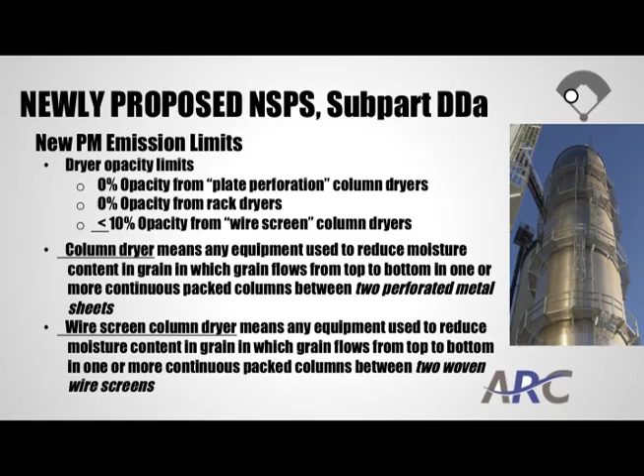Something that's new, even in the NSPS world altogether, is that it's trying to regulate portable equipment. So portable equipment has standards now. If it's at a temporary storage facility or anything like that, they're trying to say that 0% opacity can come from your portable equipment like conveyors, augers, or front-end loaders, and things like that are supposed to have 0% opacity.

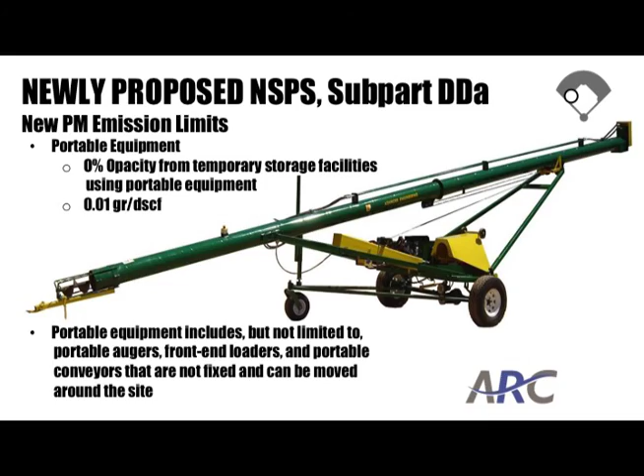They also added barge unloading for drag conveyors, have an opacity standard as well. This is new. This was not in the original DD standard.

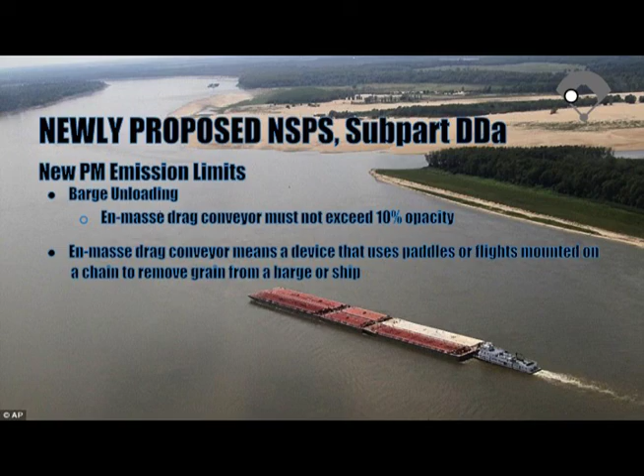We talked a little bit about the compliance requirements during startup and shutdown. These are new as well. That's just saying standards apply at all times.

Additional testing is a big deal. It used to be in the old DD that you would do kind of a one and done. You do your initial method 9, which is an opacity observation, and then you do your method 5 and 17, which is kind of your particulate testing where you put probes in the stack. You do it once. The new DDA standard requires that you do the method 9 once every year, no more than 12 months in between each one. And then the method 5 and 17 has to be done every 5 years.

So this is a big cost to folks. It used to be you just do it once and then you don't have to keep doing it over and over again. But now the new DDA standard has requirements that go into perpetuity, and we have to keep doing more testing.

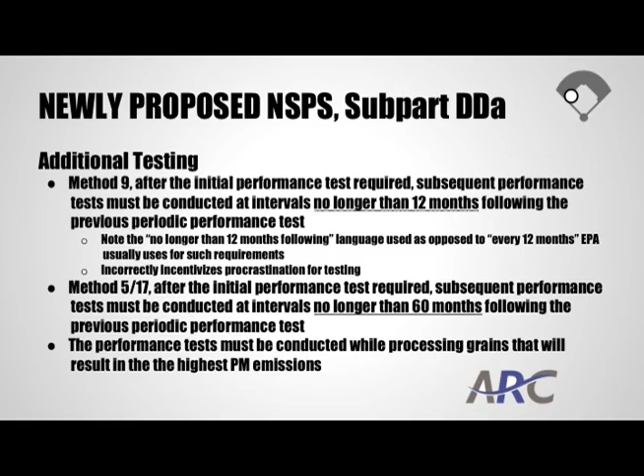Additional monitoring: there's weekly visual emission checks. There's also baghouse inspections every 6 months. These are all new that weren't in DD before.

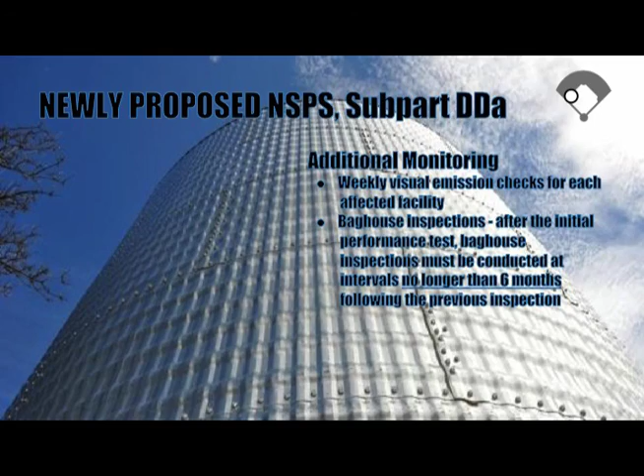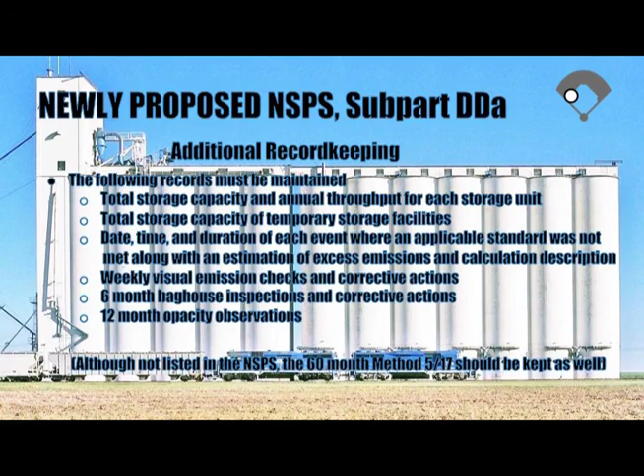The temporary storage facilities are also a big deal because this contributes to that magical number of 2.5 million bushels. You take into account your temporary storage facilities. What is a temporary storage facility in DDA? That is something that uses asphalt, concrete, or other comparable base materials. It has a rigid wall, also has adequate aeration and a covering. If you have all 4 things bulleted there under the new DDA, that would be considered a temporary storage facility that you're supposed to consider towards your permanent storage capacity of the 2.5 million number.